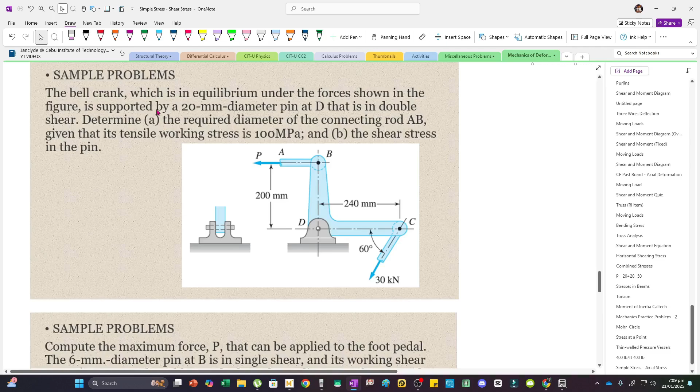Now, compute the maximum force P that can be applied to the foot pedal. The 6 mm diameter pin at B is in single shear and its working shear stress is 28 MPa. The cable attached at C has a diameter of 3 mm and a working normal stress of 140 MPa.

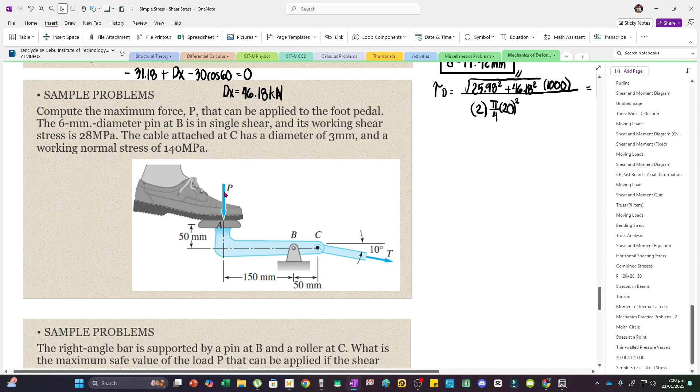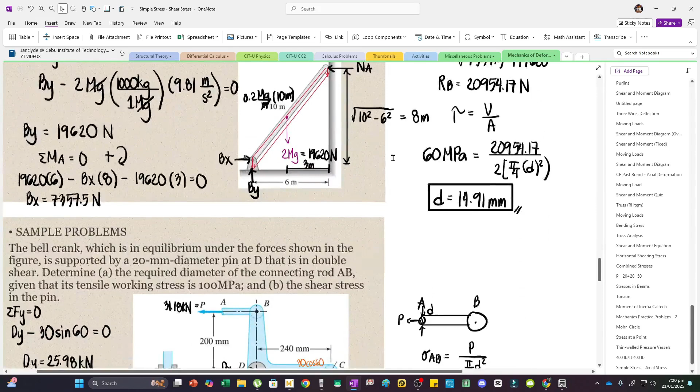Essentially, in this problem, P is not given, and we don't know T either. So the question is, what is the maximum force P? We can still apply treating P as 1, just like before when we treated F as 1, and then got the force in AB and BC in terms of that variable. It's the same here—whatever is unknown, you can treat it as 1, then just multiply by the variable after you get the results.

So what if I treat it as 1 right away? What can we first form? We need three equations, because at point B we have two reactions: BY and BX. Those are unknown, and T is also unknown. So three unknowns means we need three equations. P is already treated as 1, so it's essentially no longer an unknown in our approach.

First, I can sum up moments about point B to eliminate BX and BY. The rotation caused is counterclockwise, so it's minus 1, multiplied by the perpendicular distance of 150. Then T has vertical and horizontal components. The horizontal component going to the right equals T cosine 10, since this is the adjacent side with respect to the horizontal. The vertical component is T sine of 10 degrees. Again, for moment at B, the line of action of T cosine 10 passes through point B, so there's no rotation from it. But T sine 10 has a moment arm of 50 mm, and its rotation is clockwise, so plus T sine 10 multiplied by the moment arm of 50, equated to 0, since those are the only forces causing rotation about point B.

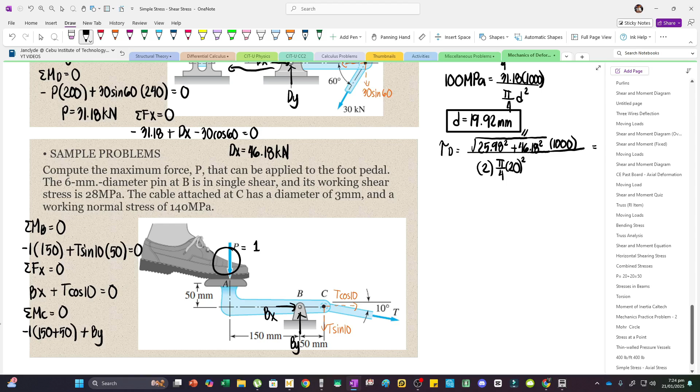So, summation of moments about point C equals 0. We have 1, negative 1 since the rotation it causes about point C is counterclockwise, and the moment arm is 150 plus 50. Then we have BX, whose line of action passes through point C, so it causes no rotation. So it's just BY left—plus BY multiplied by 50. Why plus? Because the rotation caused by BY about point C is clockwise. Equate that to 0.

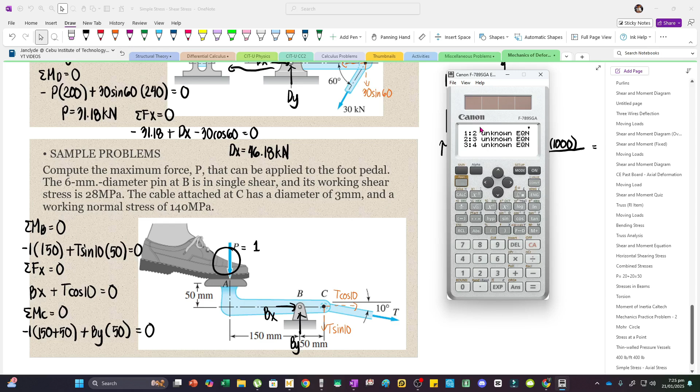Now we already have 3 equations, 3 unknowns, so we can solve that. So go to the equation mode, but instead of 2 unknowns, go to 3 unknowns—press 2. But again, they need to be arranged.

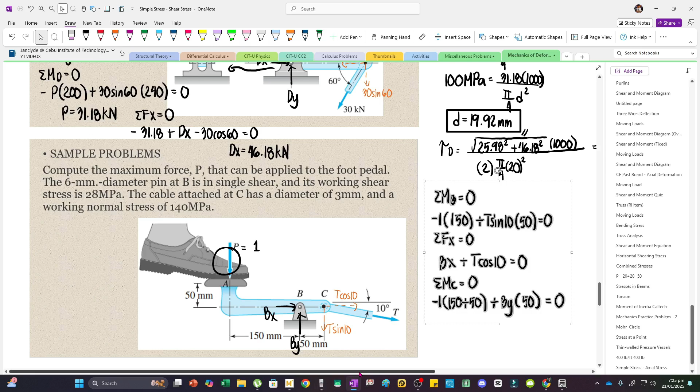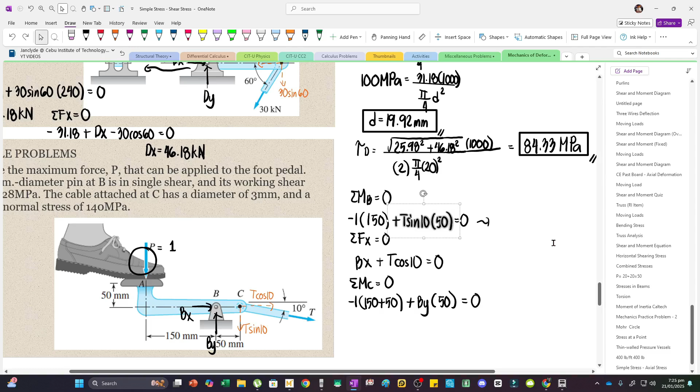Let's arrange this. All constant terms need to be placed on the right side of the equation. So this would be—let me copy that—T sine 10 multiplied by 50, equals 150.

Then for the second equation, let's also arrange the variables, with T first. So we have T cosine 10 plus BX equals 0. For the last one, there's no T variable, so we start with no BX either—just BY. So BY multiplied by 50 equals, moving that to the other side it becomes positive, so 1 times 200.

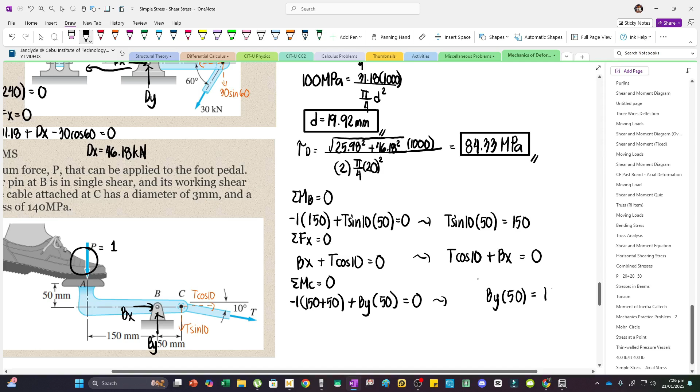So let's treat T as x, BX as y, and BY as z.

So, dito tayo. Coefficient ng t or x, di ba? Yan yung a. Coefficient ng y is b. And then, coefficient of z is dito sa c. Tapos, yung d naman, yan yung constant term na nasa right side ng equation.

So, ito pala, this is sine 10 multiplied by 50. Ayan. And then, walang term dyan na merong bx, wala ding by. So, automatic ka na, dito ka na sa 150.

Ayan. Tapos, sa second equation, merong t cosine 10. So, dito yan sa x. Kadugtong niya. So, cosine 10. Then, bx, nasa y yan. So, ito, meron siyang coefficient na 1. Diba? Meron niyang 1 essentially.

And then, equal 0 na lahat. Kasi walang term dyan na merong by. And then, for the last one, walang term na containing t, wala ring bx. So, 0, 0. Pero yung by, meron siyang coefficient na 50. So, 50 dyan. And then, dito naman, 1 multiplied by 200. Or, pwede ring 200 na lang.

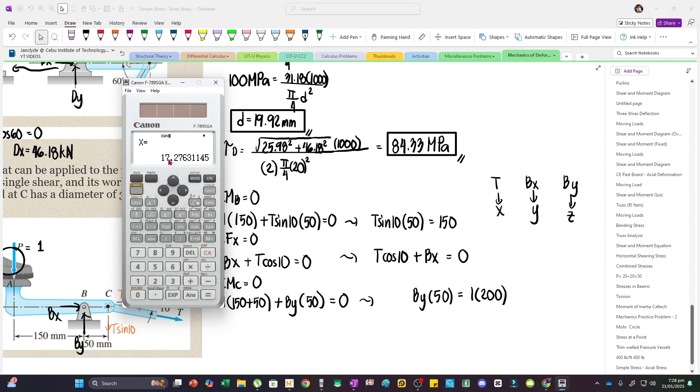So, press equals. Ito yung force ng, ano to? Ito yung t. Diba? Kasi yan yung x. So, t is equal to 17.276.

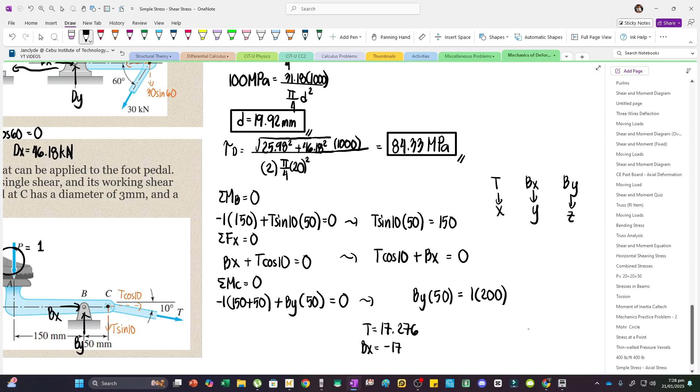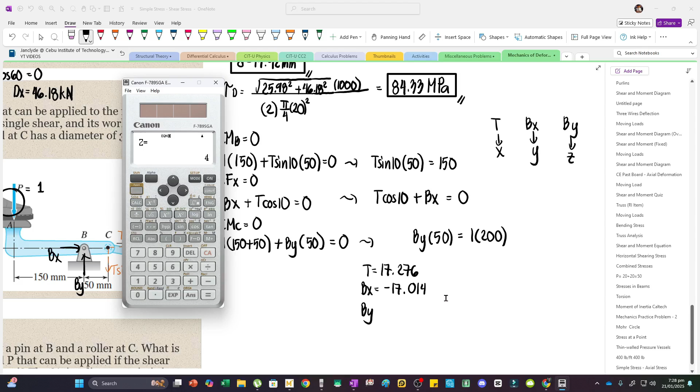And then, bx naman, this is negative 17.014. And then, by is, press equals ulit, this is 4. Positive. So, yung direction pala ng bx, instead of going to the right, this is going to the left.

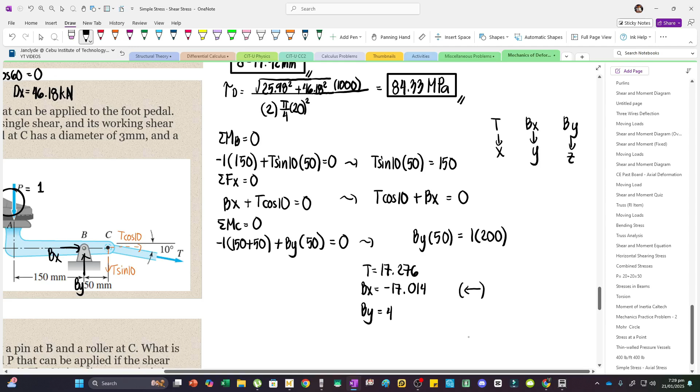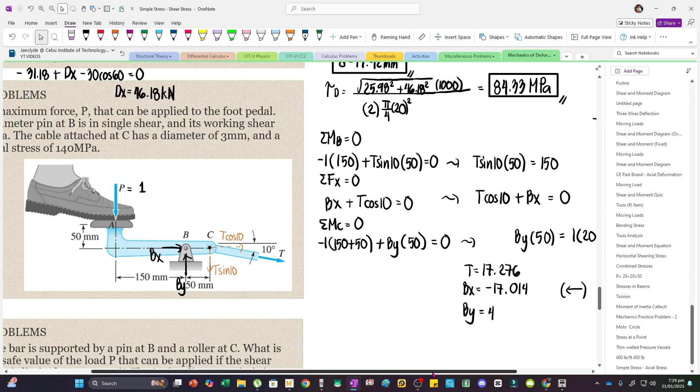Ayan. But again, ano yung tinrate natin as 1? Diba yung p, tinrate natin as 1. Therefore, all of the answers here are in terms of p. Therefore, yung t pala, this is to be multiplied by p. Ito rin, saka ito. Ayan. So, ito na yung forces na gagamitin natin para sa calculations.

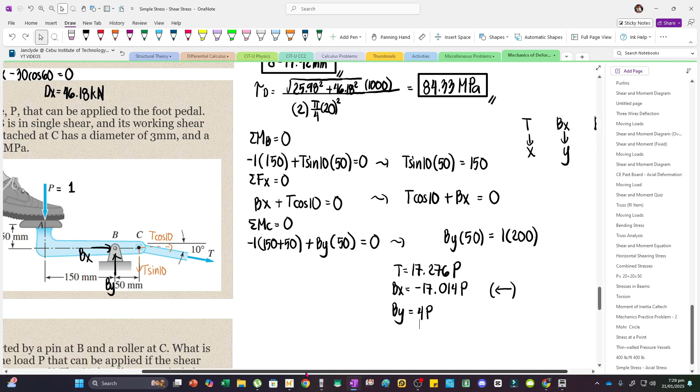So, first, meron tayong wait lang. Meron tayong working shear stress para sa pin at B. So, dito muna tayo. Based on the pin at B. Ayan. So, this is subjected to shear stress. Tapos, sinabi dyan na naka-single shear. So, wag mo nang i-multiply by 2 yung area.

Now, our allowable stress is 28 MPa. This one. Equate natin yan sa force. Ano yung force na dadalhin niya? Diba? Pin at B, it will carry RB. And then RB is equal to square root of bx squared plus by squared.

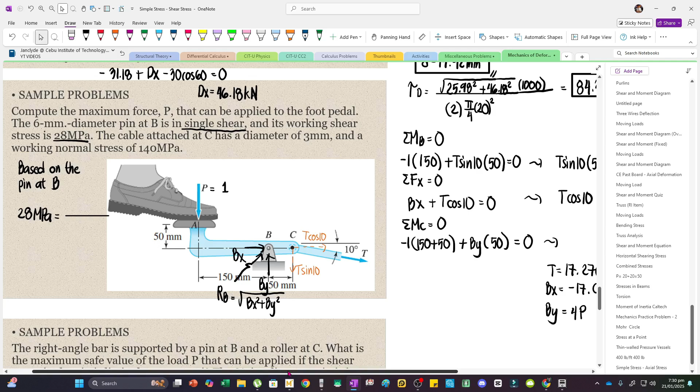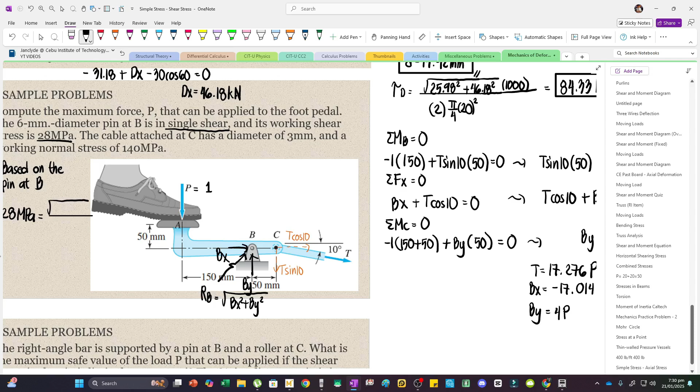So, ito na lang. Yung ilalagay mo na lang sa calculation, ito yung technique ko. Yung P, ilagay mo na lang sa gilid. And then, just input here, square root of, ano yan, yung bx is negative 17.014. But you can just use the positive value. Since yung negative value, square mo yan, it will just be positive. So, 17.014 squared. Tapos, plus, yung by is 4p. So, plus 4 squared. And then, multiply mo yung p dyan.

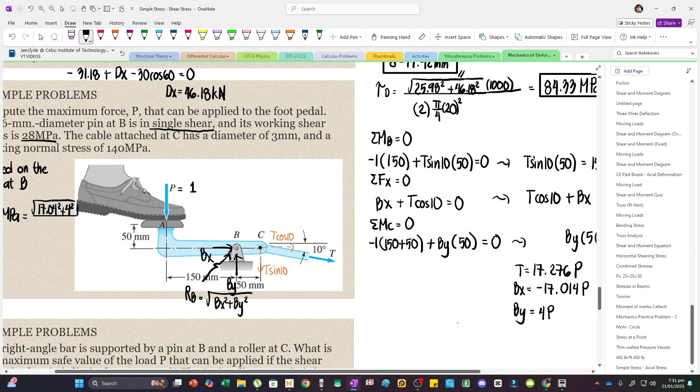And then, divided by the area. Area is pi over 4. Diameter is 6. So, multiplied by 6 squared. Ayan. So, solving P, we would have 28. Shift solve na lang. And then, square root of 17.014 squared plus 4 squared multiplied by P divided by pi over 4 multiplied by 6 squared. So, solving P, we have 45.23 newtons.

Ayan. So, ito yung based on, ano yan? Based on the pin at B. Pero, meron din tayong cable attached at C. And then, meron din siyang stress condition. Yung working normal stress niya, or axial stress, is 140 MPa. So, ito yung force dyan, essentially yung T. And then, yung cross-section, perpendicular to the screen, ito yung diameter niya, 3 mm.

So, based on the cable, we would have stress. Yung working stress niya is 140 MPa. Ayan. Equals, ano yung T in terms of P? Diba, 17.276 P. So, lagay natin yan dito. Ayan. Then, divide by the area. Area is pi over 4 multiplied by 3 squared. So, solving P, palitan na lang natin to.

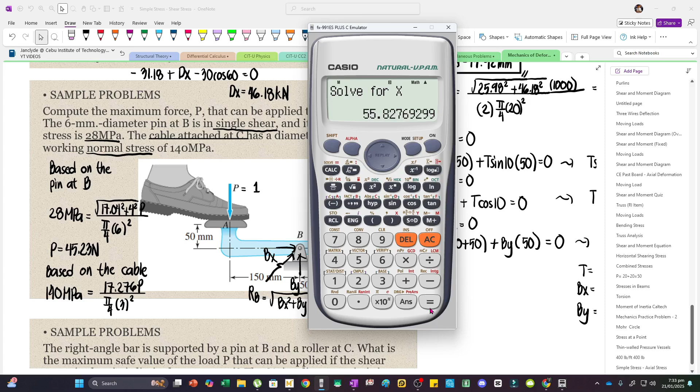140. Tapos, 17.726. And then this is 3. Ayan. So, 55.82. 17. For well, 0.276 pala. Ayan. So, 57.28. Tapos, naka-newtons.

So, alin dyan yung pipiliin natin? 45.23 or 57.28? Yung tanong is maximum force P that can be applied. So, kailangan walang magfe-fail. Yung pin at B, kailangan safe siya, saka yung cable at C. Therefore, we have to pick 45.23. Mas maliit kasi yan. Ayan, so ito yung maximum safe load. Ito yung kaya ng cable, but hindi yan kaya ng pin. So ito dapat yung magagovern.